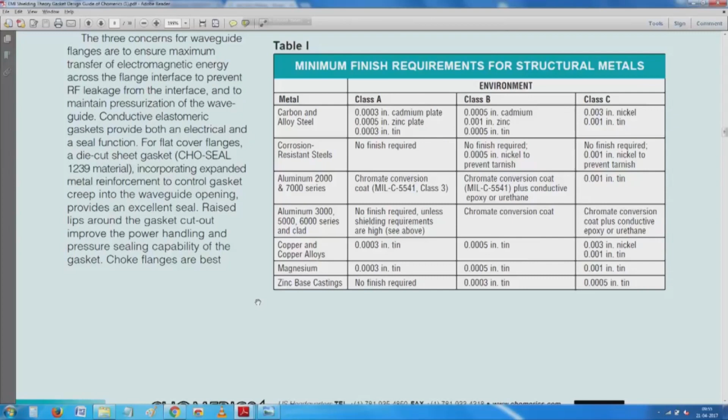So, in all this, I will get back to this thing which I left yesterday. So you see here, finish requirement for structural metals. We have this saying, what type of coating and all you give, and it seems the common compatible coating seems to be this chromate passivation or chromate conversion.

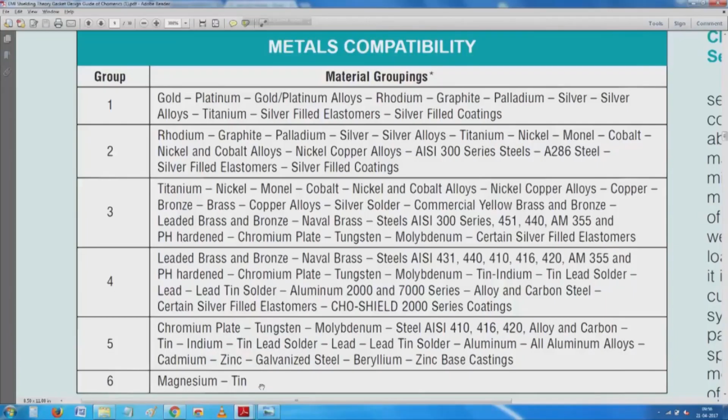As you go down, each company has its own trade name and compatibility. So you see here, the first group talks about these various things, including gold and silver and so on, and all the way down you have magnesium and tin and all that, with each of these groups overlapping, making it possible to safely use materials from adjacent groups.

So the issue here is that depending on the type of materials we use and depending on the type of contact surfaces we use, when something has to make contact, this is where the dissimilar materials issue comes in. And as if that were not sufficient, we have the problem of moisture and other, I will say, electrolyte type chemicals in the atmosphere, so everything forms a nice cell.

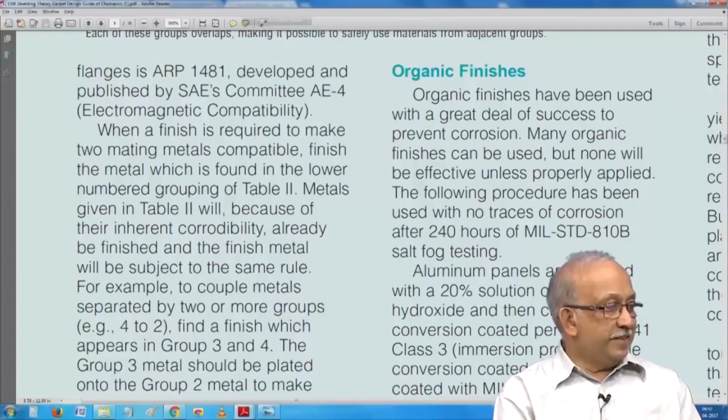I have given an example of how nickel cadmium batteries are made. So obviously nickel and cadmium do not go together. So kindly read it with me here.

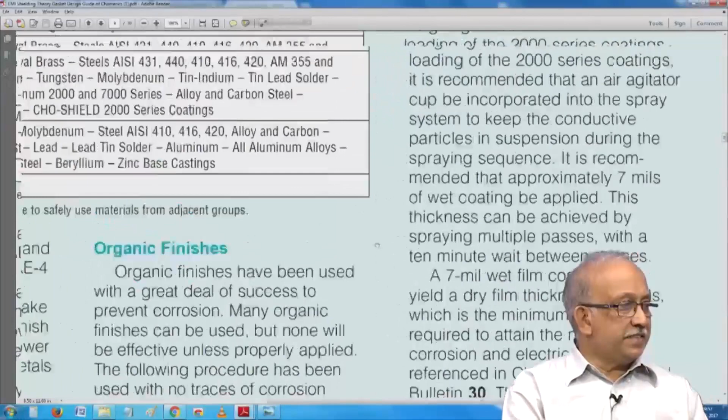So we have here a big list of chromate conversion coatings, iridite, and this can be considered as such, and then they have given, from their own characteristics, this thing, saying we try to use conductive urethane coatings.

This coating sticks to the surface where you want to make a seal, which is a very positive thing. So they have given here, saying -- I think if you remove all the double negatives and all -- not enough, actually a lot can be said about surface preparation, and it needs to be said about it. So they have given details about how much and so on.

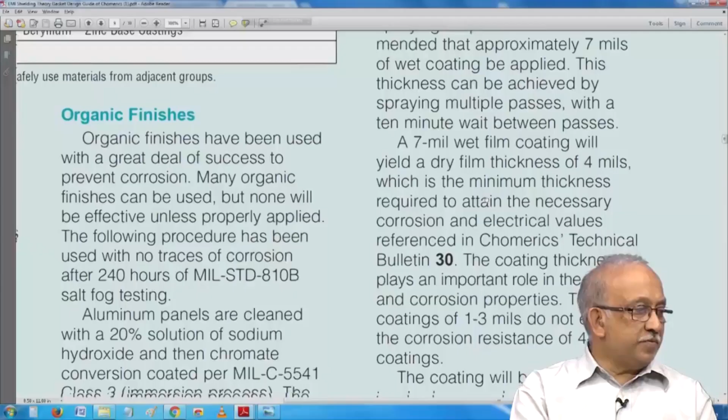Smooth to the touch when cured, recommended that the coating be cured at room temperature for 2 hours, followed by their process -- it probably comes to around 120 degrees centigrade for 1.5 hours, whenever alternate cure cycles are available, and so on. The thing is, all this has been developed saying how to apply these materials.

So, I suggest you read up more about it.

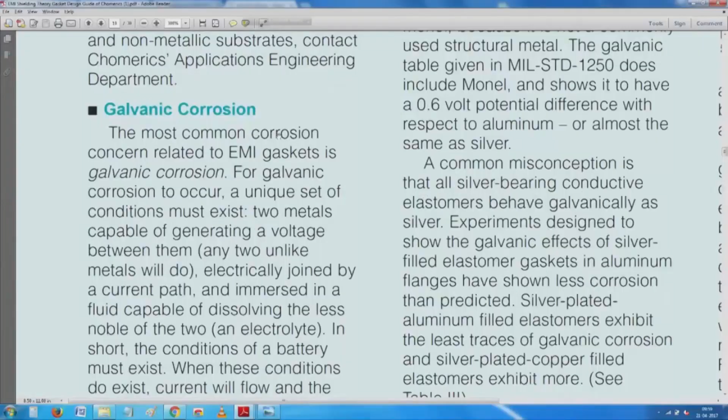What is galvanic corrosion? For galvanic corrosion, a unique set of conditions must exist: two metals capable of generating a voltage, electrically joined by a path and immersed in a fluid capable of dissolving the less noble of the two, an electrolyte. In short, the conditions of a battery must exist.

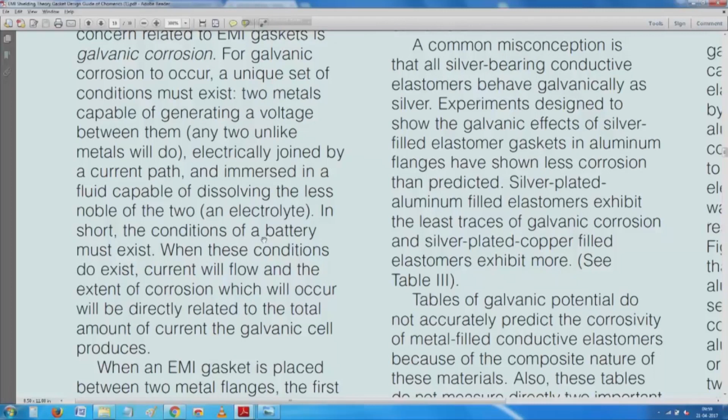This is exactly what I showed you a few sentences ago. Whenever you have a liquid that forms the electrolyte, and two dissimilar metals, it is almost like a battery. So you know what happens. When you do not want it, it will become a battery. When you want it, it does not. That is the reality of it.

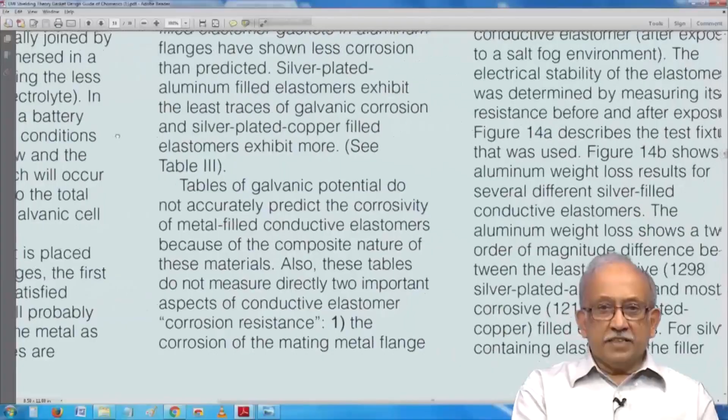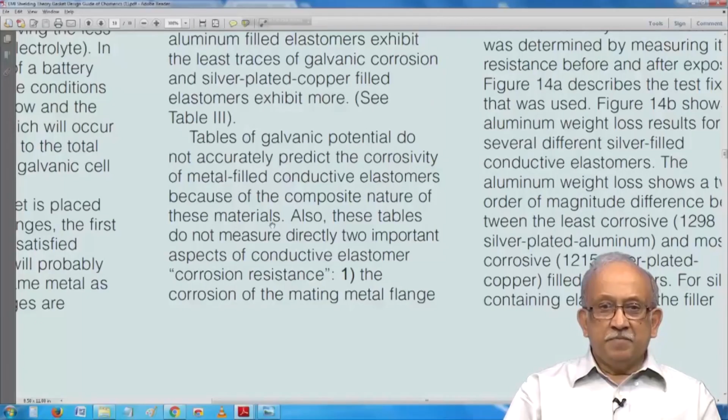So there is something called the galvanic potential. But in spite of it, a caution has been given here: tables of galvanic potential do not accurately predict the corrosivity of metal filled conductive elastomers because of the composite nature of these materials. These tables do not directly measure important aspects, such as corrosion resistance and the corrosion of the mating metal flange, and so on.

If you go down, you will see that a huge amount of data is generated. Allow me to move on to the next slide.

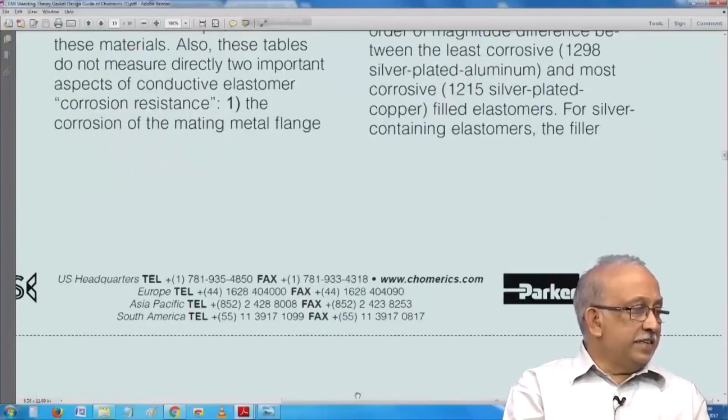So like all other tests, including IP67 tests for immersing something for long periods, and also for drop tests and all that, there is no simple easy way to predict behavior. It's chaotic.

I have told you the joke about raining on my picnic. So either way we have a problem. If I carry an umbrella, it won't rain, so I look funny. If I do not carry an umbrella, it will rain, and I get wet.

Same thing in the case of this EMI also. After the EMI, all the precautions are taken. Everything is tested using test fixtures like this. You understood?

So there's a lot of stuff about how the weight loss occurs over time, how corrosion takes away the material, and so on. So we have this very important thing.

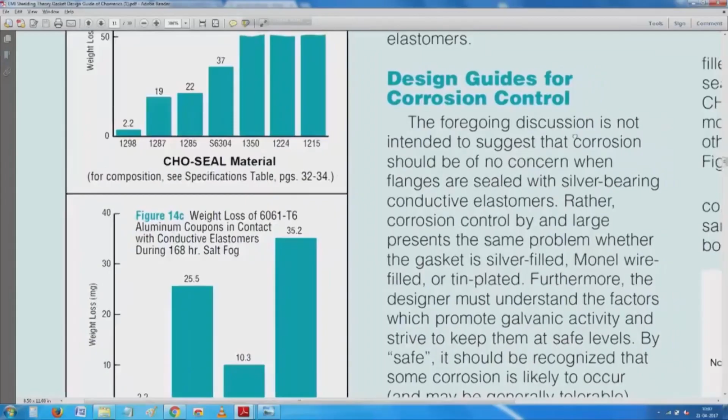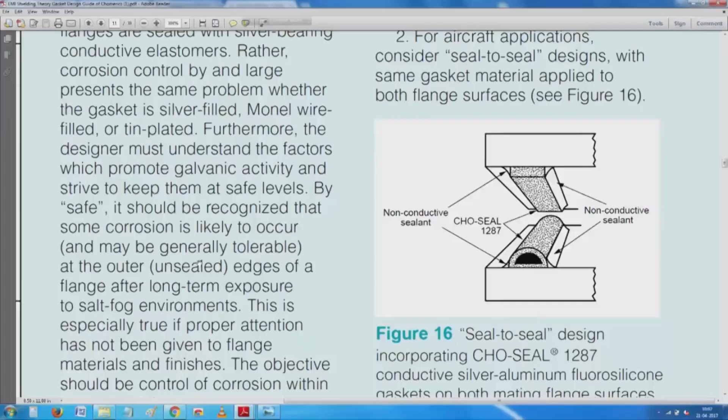Corrosion control by and large presents the same problem whether the gasket is silver filled, monel wire filled, or tin plated. Furthermore, a designer must understand the factors which promote galvanic activity and strive to keep them at a safe level. It should be recognized that some corrosion is likely to occur. So seal to seal, non-conductive, and so on - a huge amount of data is available.

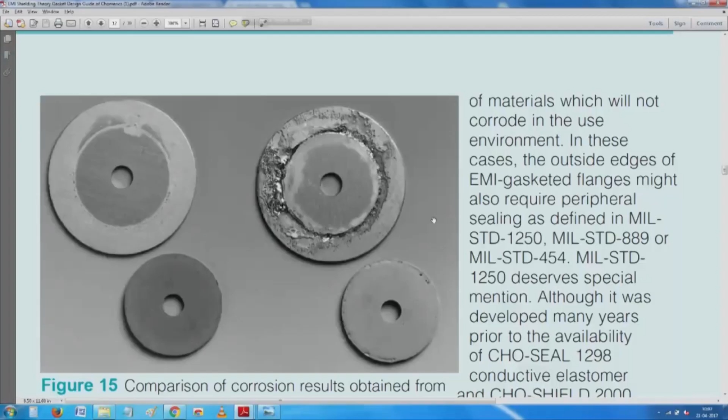And then here, pictures are shown of the test results. You see around the edge, where it is exposed to the atmosphere and can get all the necessary moisture, it has corroded all around at the edge. The center does not seem to be so bad. This is a comparison of corrosion from CHO-SEAL and pure silver filled elastomer with aluminum.

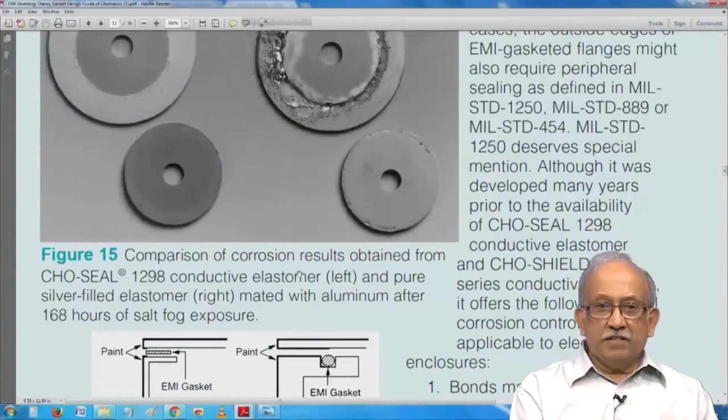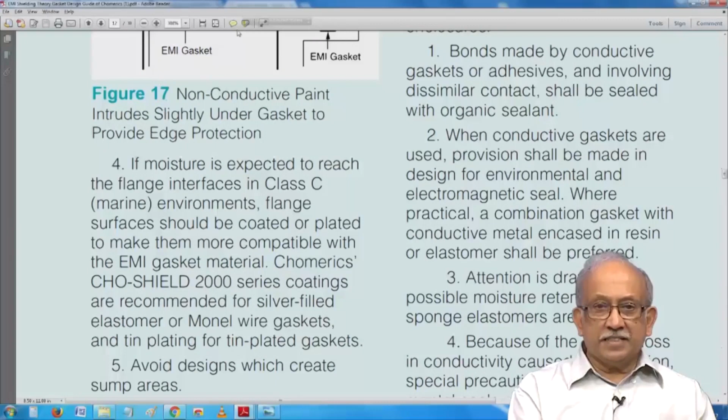This, well, I will not say it is not real, it is individually case specific. Every time there are minor variations, including the clamping pressure and the ambient conditions, we have this problem. So we have this class C test, and if moisture is expected to reach the flange interfaces in class C marine, flange surfaces should be coated to make them more compatible with EMI and so on. There is a huge amount of information on how to deal with all these situations.

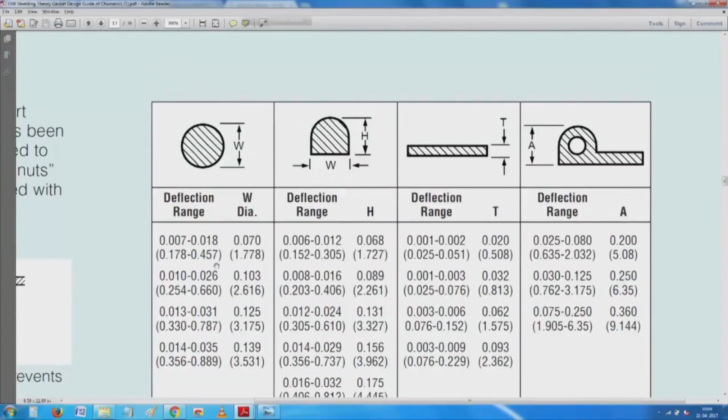So if you move a little to the right side, you see here the correct pressure and how much deflection is allowed, because that is a very critical thing. It is down somewhere here because it is a PDF file, so I need to go back. You see here, fasteners should be located such that pressure distribution is uniform at the corners, groove designs, and so on, as you go down.

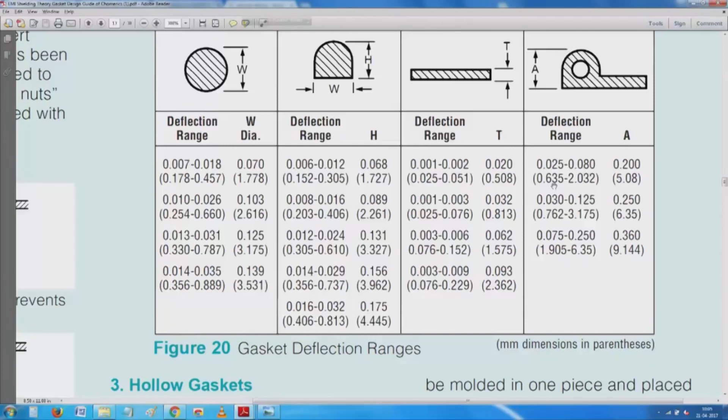So again, if you remember IP67, you need to apply force on all the sides.

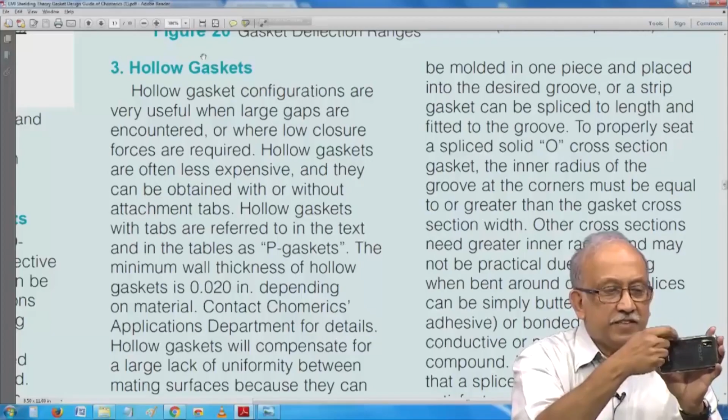If this were to be a thing that needs to be sealed, obviously you start with 1, 2, 3, all this, almost like an automobile crankcase. Large forces are allowed, but you can't do it every time. If you have a simple power control panel like what I was showing you, you can't afford to take a ring spanner and tighten everything, or in fact use a torque wrench and tighten, because there are some issues about frequently being, you should be able to do it, and then doing something like that is expensive.

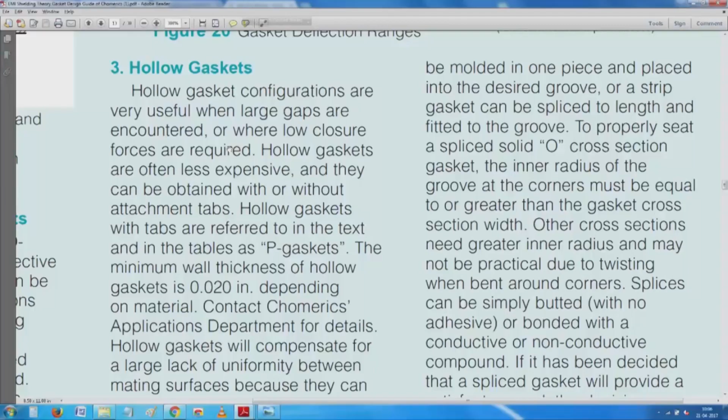So invariably they have large gaps or where low closure forces are required. So low closure force means you just need to shut and then turn one lever and the thing stays in place. That is what I had shown you on the outdoor camera there. So hollow gaskets with tabs in the text and tables are referred as P gaskets because they are a little like that. Minimum wall thickness of the hollow is about 0.5 millimeters, and then typically up to 1 to 2 millimeters.

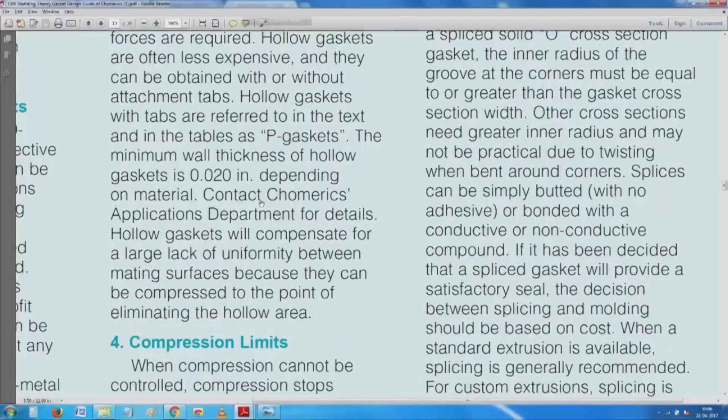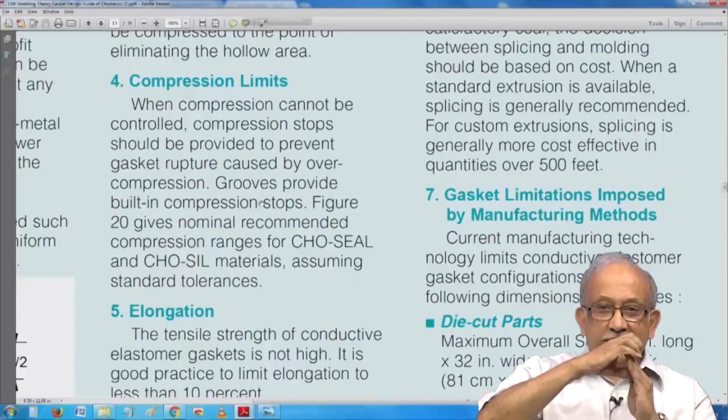So there are compression limits also, saying a compression stop should be provided. In the next few pictures, they will show you that if this has to meet here, it is not just enough if you put a little bit of gasket here. You have to make sure that you cannot squeeze it. That is what the table talks about, saying you put a stopper to ensure that beyond that it can't be squeezed. And then we have this stuff about manufacturing technology, how do you die cut and so on.

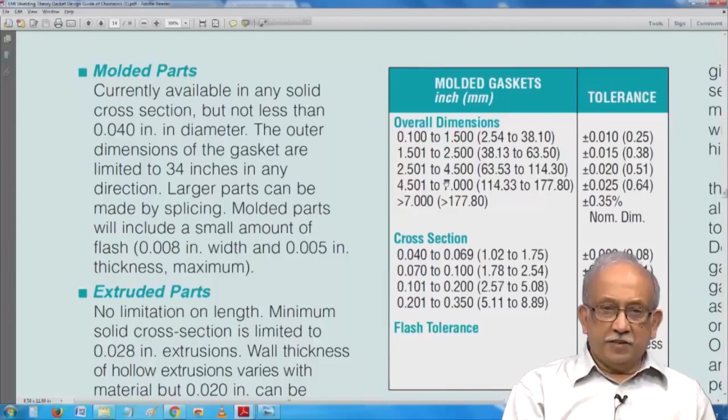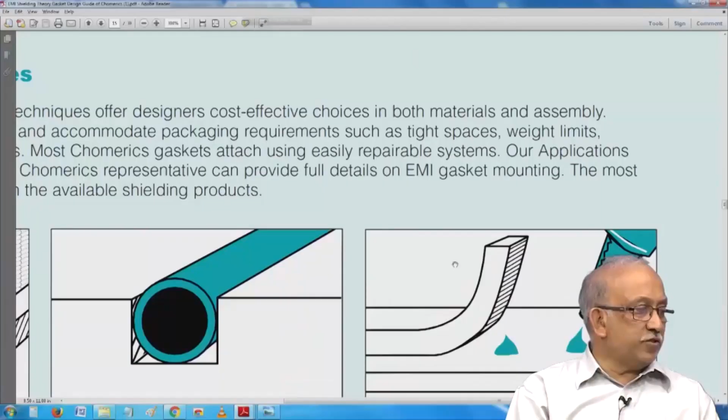So based on this, exactly because of this, when I told you, it is case specific, meaning every time we need to find out how the things work. So we have here, depending on how well the tolerances are held when you blank them out, fully mold them, or when you punch them out, or you have an extruded strip. Okay, die cut gaskets and so on. This is more a detail of the, see here, this is what I was talking about. So you have forces and thickness and all that. I will just go through quickly. Now you see here that it is just not enough.

You have pressure sensitive adhesives and how to attach it. Friction fit in a groove. So some of you who have watched people cooking using a pressure cooker, you see all the pressure cookers come with a gasket. In these parts of the country it is common, and we can't afford to have a very hard gasket where you have wing nuts on all the sides or levers and you clamp it with large force. That is only used in places like our laboratories where we have autoclaves and vacuum and pressure and all that. All other places you have just a split gasket like this, a small gasket. It sits on two things and then you close the lid and slide the lid and we expect it to stay in place.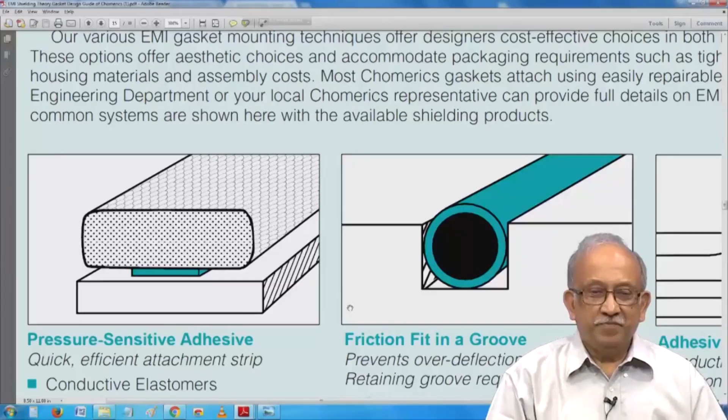It is okay, it does not matter. A gasket probably costs 50 rupees or a little more than that. I will call it $1. So you can change it once in a while. In fact, I am one of the persons who keeps a spare gasket; at the first sign of any leakage or any movement which is too smooth, we discard the old one and start using the new one. You have seen this, no?

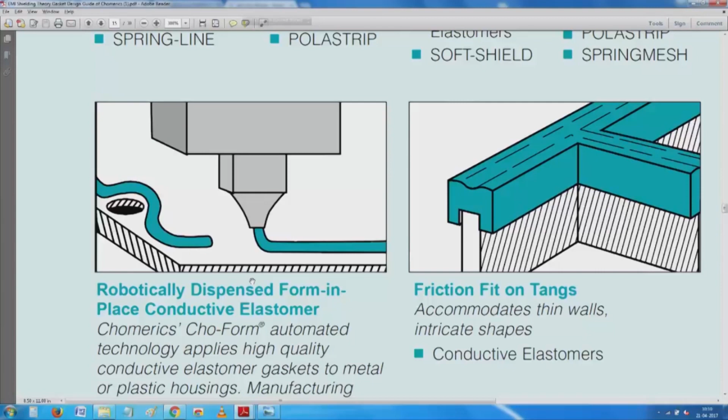We have adhesive, non-conductive, spot bonding and friction fit in a groove, and robotically dispensed form in place conductive elastomer. You would have seen this as caulking which is used for windows. You have the RTV compound, room temperature vulcanizing, some rubbery material. The advantage of it is that for quite some time it is expected to continue to be soft. It should not become hard. If it is hard, it has some problems.

So just before the arrival of winter, people probably seal all the windows with the window sealant, and afterwards they will peel it, remove all the accumulated dust and other stuff, and then we are back in business. However, in the case of professional equipment, it is not that easy. Once you keep it in place, until something functionally fails, it is unlikely that you will ever attend to it in a periodic way of replacing the gaskets every time.

However, to prevent this, routine inspection is carried out, especially for waterborne or underwater enclosures, IP 67 or 68, where somebody examines whether any of the elements here are cracking.

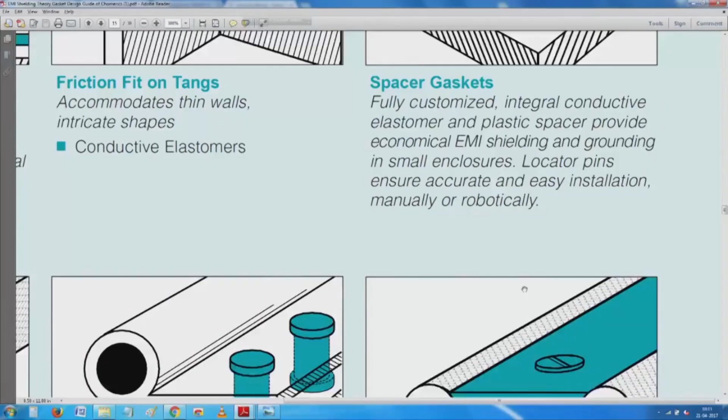So we have here friction fit. Friction fit means nothing but just push it and then it squeezes itself onto the edge of the enclosure. Then fully customized integral conductive elastomer, plastic spacer and so on. All this stuff is available from multiple manufacturers. So it is for you to decide what you would like to have, and in this you have clips to hold it in place and so on.

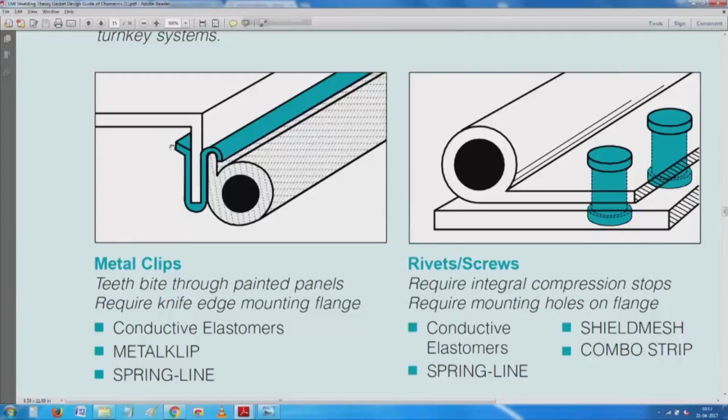If I get a chance, I will try to show a Faraday cage we have on our premises. I need to access it by taking permission. There you see that all these things that have been done here have been taken care of. So, we have all this nice

Slowly we are coming back to applied force. Most applications do not require more than 100 psi to achieve an effective EMI seal. So, you have a gasket, it has to be pressed hard. Anything more than that, as they have indicated, is likely to damage it. Anything less than that, tangential forces can come and corrosion can also start. Somewhere an optimum is around 50 to 70 psi, that is pounds per square inch.

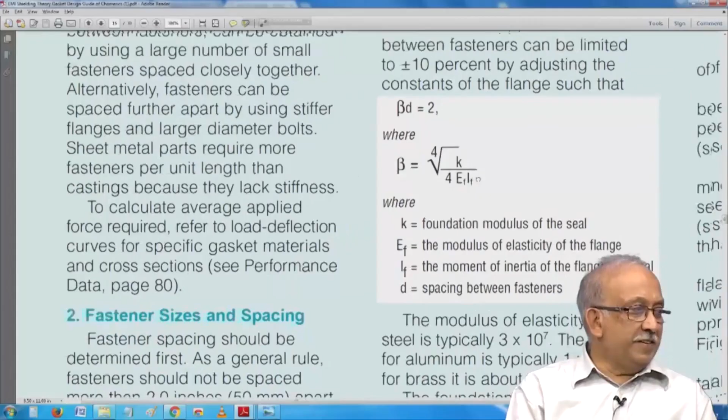Fortunately, this equation does not look so threatening, saying how much the flange deflects, fastener sizes, spacing. As a general rule, fasteners should not be spaced more than 2 inches for stiff flanges, or more than 19 mm for sheet metal, if high levels of shielding are required. The moment you leave any gap, at the time of installation there is no problem, but the slightest deflection or slightest change, often caused by temperature combined with changing humidity, will compromise the bonding, continuity and connection between them.

So, I will see if I can get some pictures before the video. So, we have our Faraday cage. In the cage, when the door is closed, all along with a pitch of 15 or 20 mm, there are fingers which make a continuous contact top to bottom, and after some use the fingers have a tendency to set. So, somebody comes to align it or something, and afterwards they replace it.

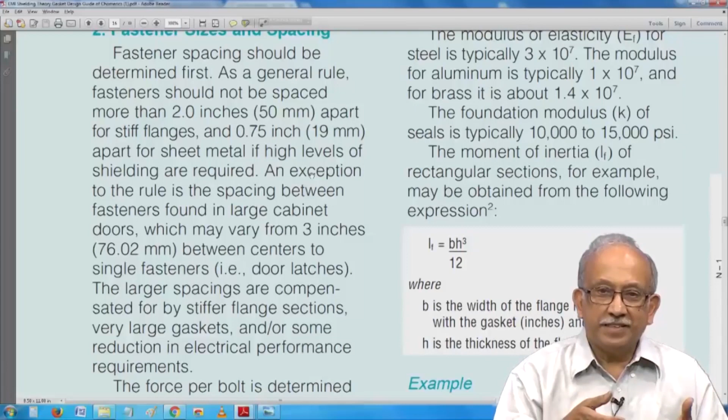And the important thing is that you must conduct a test every time. Like if you have a balance and you need to weigh something, you do a tare reset. Same way, whenever professional tests are required, before they start the test, they make sure that the whole equipment is calibrated.

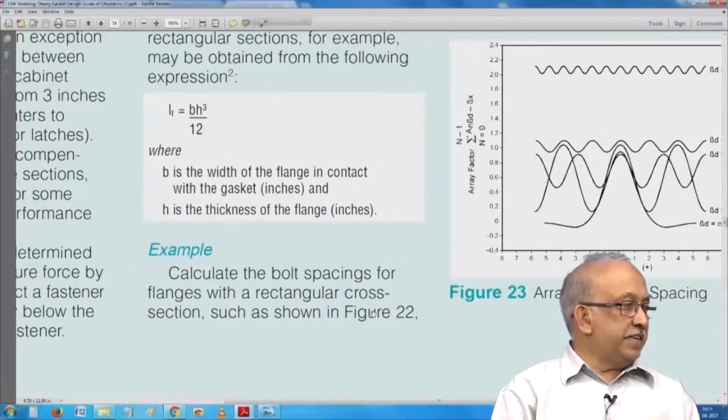So here now they have given examples of how to calculate the bolt spacing in case you want it. I think you can read it yourself. I will give you the link, and otherwise the material will be available. So, you can easily find out about the array factor, spacing, actual deflection and so on.

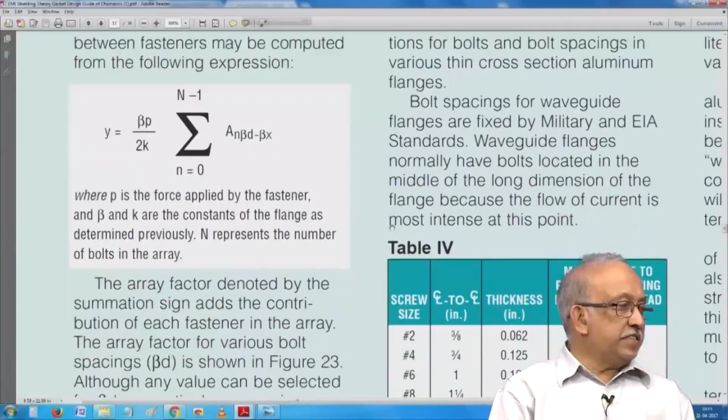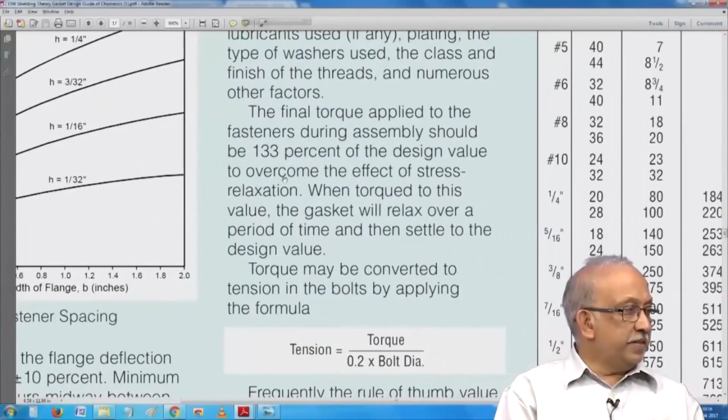And we have a little problem about waveguides. Waveguides are again a very special case. It is not connected with this at all, except that any slightest error, you may completely lose your signal. The UHF or microwave signal does not go inside at all. But you see that these have been compounded in some other way. So, all that plumbing gets seriously affected in case we over tighten things.

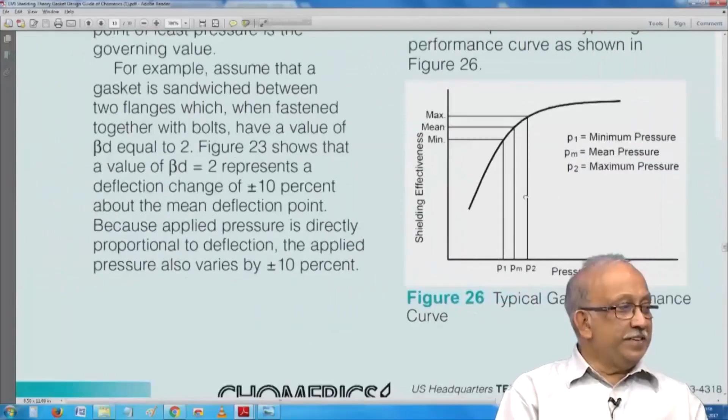So, there is a little more theory, and shielding effectiveness versus pressure is given. If you apply more than a certain pressure, it does not improve the shielding in any way. Understood? I will leave it here on two counts: because it is not immediately relevant to our packaging, and secondly, I am no expert at it, but it is for you. And most of these companies give you enough background data on how to continue with this. This is a 200-page note.

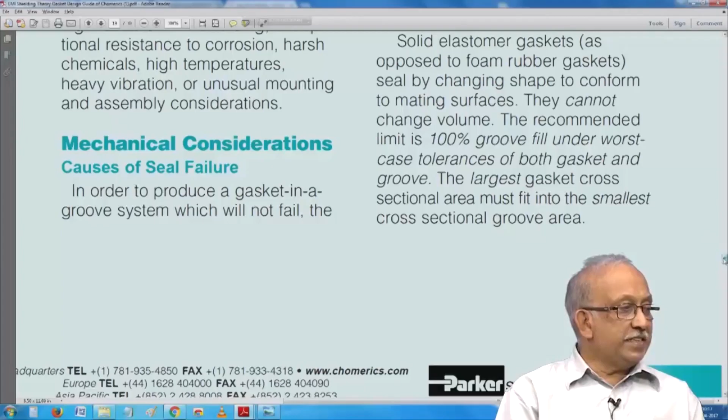So, in order to produce a gasket in a groove which will not fail and so on, you see, a huge amount of data has been given. What I was going about is, you see here, this is an interesting thing. Now you will notice

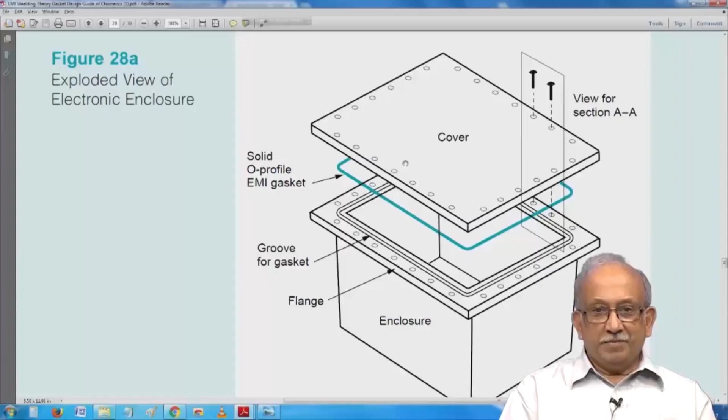Make sure that it is level. So, it is probably kept on a special clamp on a milling machine, and a small finishing cut is there. Then after this, if you now try to clamp things, and this green is a gasket, see here, so you have bolt spacing, and then you have an O strip, conductive elastomer in a rectangular groove.

You see, small errors can happen here, lack of conformity. To avoid this lack of conformity, they try to give the milling cut, so that generally they sit together. It is only in extreme cases this can be done.

If you recollect, in the video I was trying to show you the water cooled inverter. I do not know whether it is called an inverter or a drive, where because of the high current density, we actually have water pipes running inside the electronics. In spite of our using good coolant, we still have issues.

Most coolants still have a problem. If it is pure good water, obviously water has the best specific heat. Anything else you do for improving some other thing, including the boiling point, including the antifreeze, including everything, part of that conductivity comes down marginally, how well it can take away heat from the adjoining parts. And coupled with this, any of these inequities, we end up with

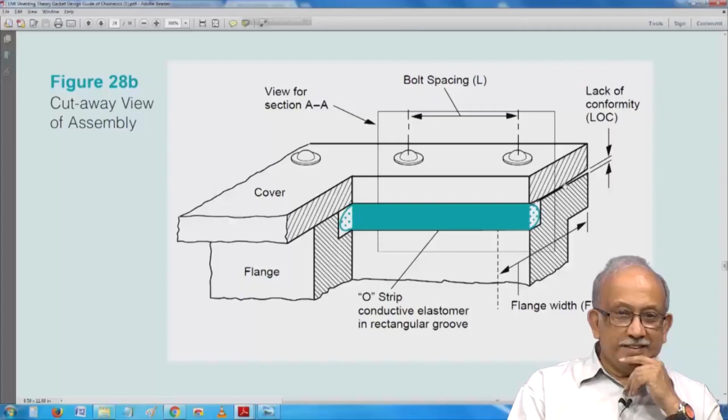flooded something. I have already talked to you about how a failure in a gasket ends up with a flooded crankcase. So, with your water, small leakages will be there which go into a crankcase, and these will get circulated. In the normal cases there is no problem, because I think routinely you check these things.

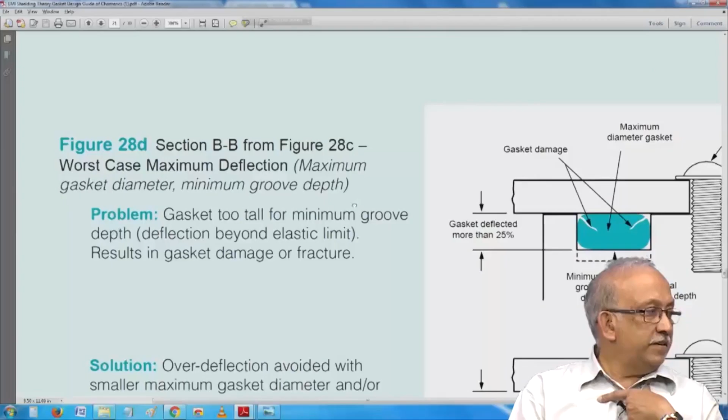So, as you go down, you see you have this beautiful thing, where the bolt is spaced, where its full force is there it is okay, but in between we have the problem of things failing a little. So, further I will go down. Maximum gasket diameter, minimum groove depth. So, you see here, these are simple cases by which

how you will pack a gasket in a groove, but these are a matter of detail, and if you are to design any of these things, most likely it is enough for you to sensitize yourself that such things exist. You will not be an expert in it, because first of all you have to locate the materials, find out all these practices. Secondly, after populating or packing the whole thing, you have to ensure that you put it through some tests.

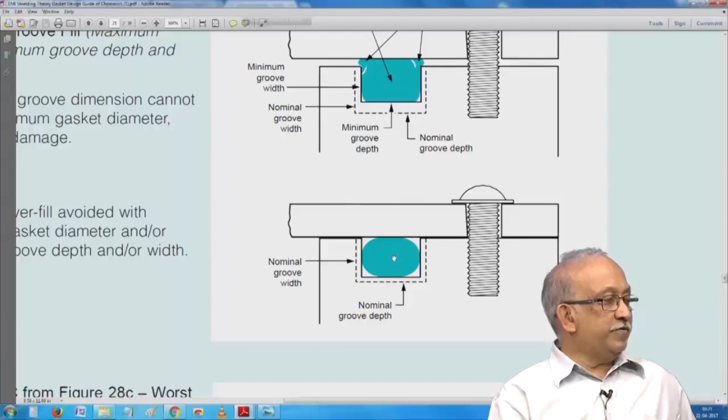So, these are all part of the testing thing, and how if you overpack it, chances are, see, there is a little bit of creep which has set in here. In this case, nominal groove width, it does not matter. So, we have so many of these nice pictures and all. Maybe this flow chart

will give you an idea. You see very clearly, there is no automatic converging set of rules which will pick one of them. I won't say it's completely trial and error, blow something and find out. It's a little iterative: select, start with something and then build on it. So it's given here: select a reasonable gasket diameter, calculate groove depth, establish tolerances.

Here is the problem. Normally most of this gasketing, if it is molded, will come in a fixed size with probably some blister pack. In the blister pack, they will probably include some adhesive if it has not come with it. Sometimes it will be dry powder, sometimes it is wet, and if it is a round or a square, it is usually folded and packed such that it sits nicely.

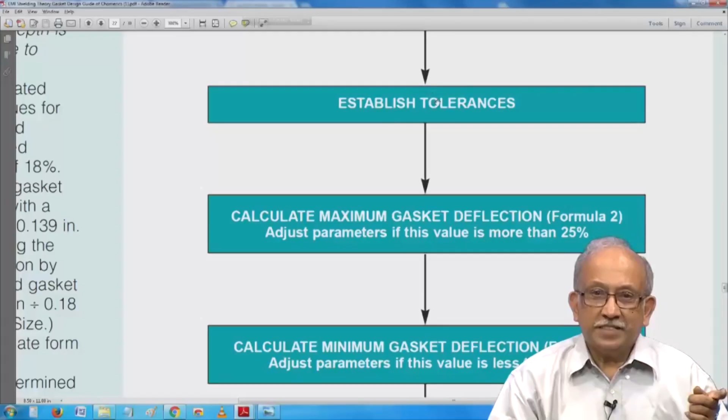So a circle, if you fold it, you can reduce the whole thing into a 1/4 of the diameter, but it will end up with 3 or 4 folds. So once you open it, somebody has to measure the thing, asking whether the tolerances are valid. Especially with something which is stored, both things can happen.

Gaskets swell, they become bigger than nominal, and also they become brittle, and sometimes they shrink. Shrinking in the thickness is not so bad, but shrinking in the overall material, the whole size, does cause a problem, which happens in the case of the cooking gaskets. If you start with an 8-inch, yeah, 8-inch looks big, 200 mm is big, probably they are all 180 mm. A worn gasket, you will notice that it would have shrunk by about 5 millimeters, and just that 5 millimeters is sufficient for it to be absolutely unusable.

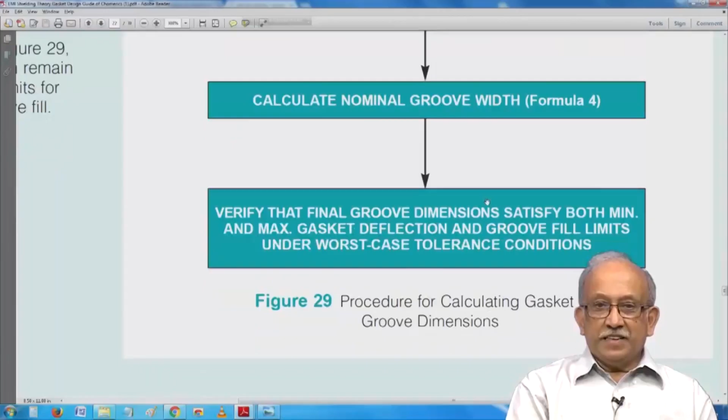So here you talk about gasket deflection, minimum gasket deflection, formula 3, calculate nominal groove width, verify that final groove dimensions satisfy both minimum and maximum deflection and groove fill limits under worst case tolerance conditions. This is only for calculating the groove dimensions, but I said it is a professional specialist job. Normal electronics people need not worry too much about it.

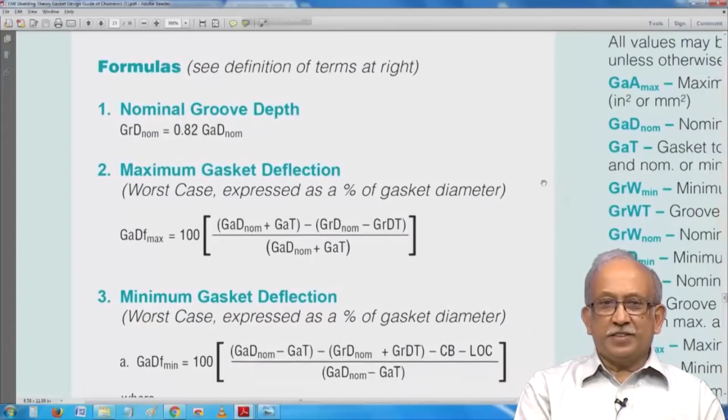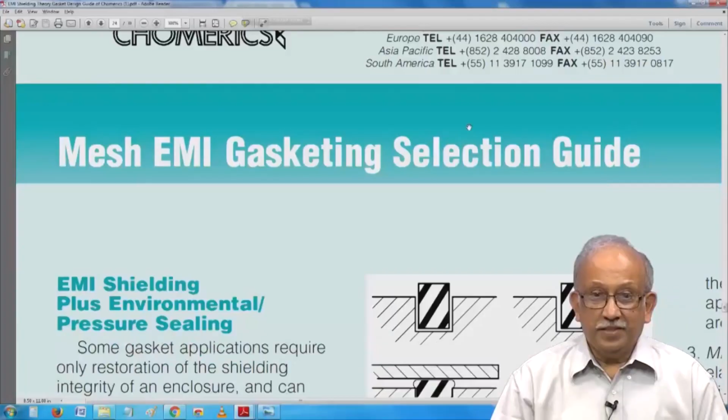So there are so many of these formulas, and fortunately these formulas are easy to use because the next level of maths is not involved. There are no integrals, no differentials, no summation, no matrix multiplication and so on. Oh, we are coming into the porous region. So far they were solid, though the elastomer may have some small cells inside, either open or closed.

We come to a very nice interesting thing, a mesh gasket. Any advantage of a mesh gasket? To start with, overall weight is less. Secondly, again going back to the original theory, depending on the frequency, the lower the frequency, the larger the holes are there. Higher the frequency, I do not know, I am not able to make out. All I know is 2.5 mm is sufficient for 30 megahertz, which was the earliest communication designs I have done.

So you see that the advantage of a mesh is they can be spaced close together, and if you just pack an area with it, overall the amount of material content is small. The moment material content is small, because a mesh is made of wire string, you can use the highest quality material, and during the manufacturing they have perfect contact. A reasonable example is your coaxial cables or even shielded wire which you use for audio. Seen that, no? It has a nice crisscross braid. Imagine the same braided thing but much more closely controlled and much thicker. So you have crisscross thicknesses of not just one, maybe a dozen layers and so on.

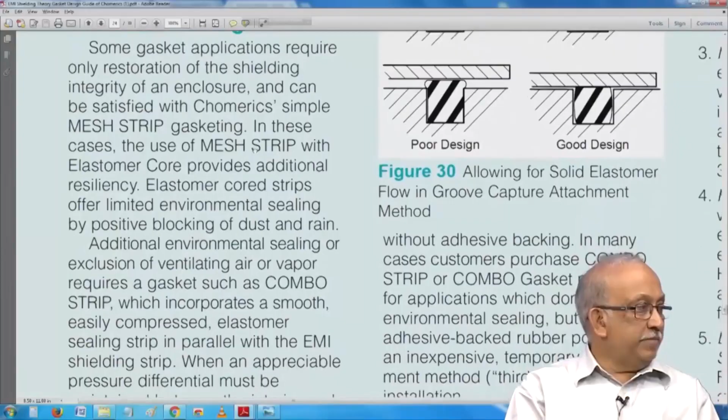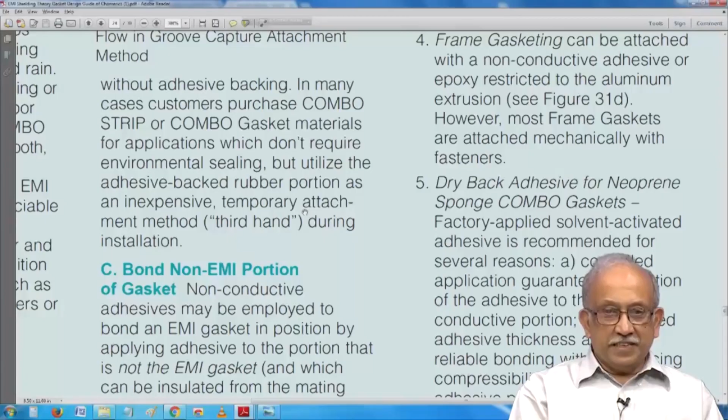Here what they have done is mesh strip gasketing. The use of mesh strip with elastomer core provides additional resiliency. A little problem with the earliest thing is that if something can be made porous, chances are it may not do the thing properly. The function of isolating or shielding may not be done properly if it is very porous, and if it is very dense, it is not flexible anymore.

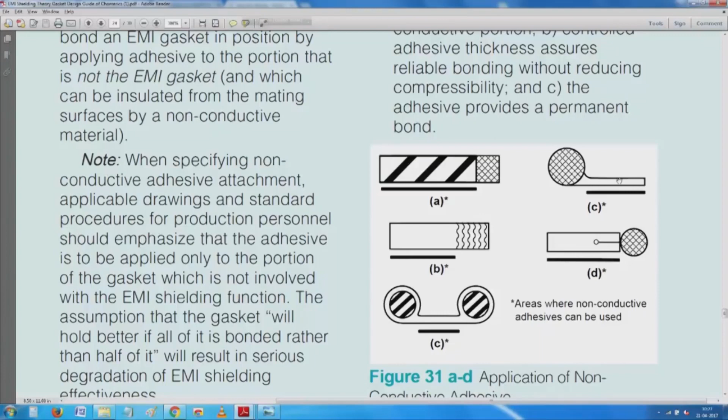So they have tried to give here, with all these things, what it is packed with. Obviously inside is where the mesh is. This part is the backing up thing, which can be held together. So things can be pushed inside. Then a simple non-conductive adhesive is sufficient, and subsequent pictures will show you more and more about it.

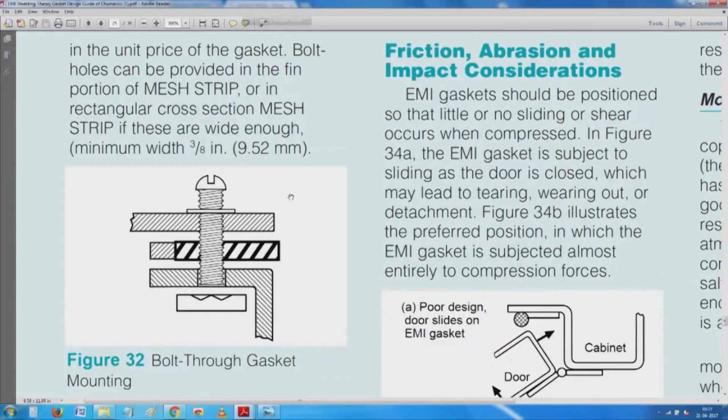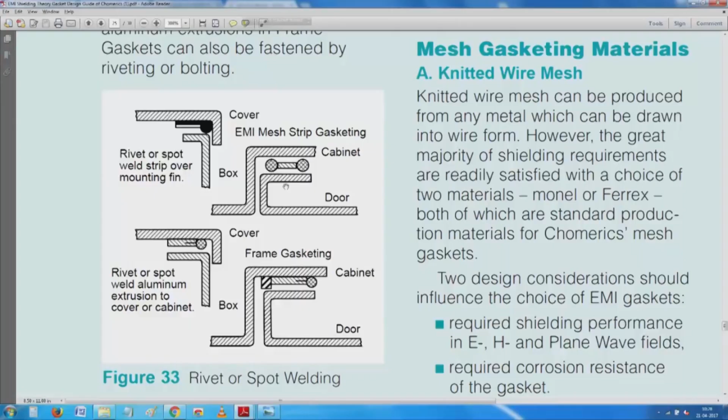So the mesh portion itself can be punched. You have the mesh portion that is punched. It sits properly, and you see here large amounts of specific cases on how to take care of most cases. So you see here there are gaps, unwanted gaps, and there are places where things touch each other. So we can see here rivet or spot weld strip over mounting fin, and so on. A large number of rivet or spot weld aluminum extrusions to cover or cabinet door.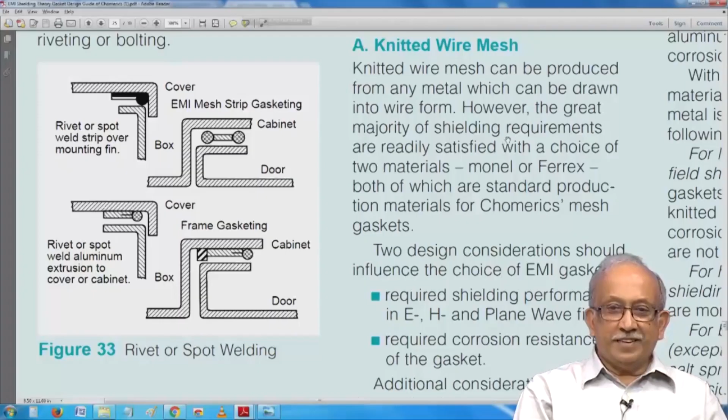It's a little like, is it not common sense? Of course it is common sense, but in the rush of things, or trying to concentrate on other things, chances are we'll miss it. It's a little like proofreading. When you write the first time, I don't think you can really read what you have written. If somebody else reads it, he'll notice that it doesn't seem to sound well. Forget idiom. Normal typos, or the printer's devil comes in. Same thing happens in the case of these.

How we implement small detailing while the doors are closed, and how we implement small detailing about how to clamp things. Yes, it is a lot of common sense. In this case, common sense being a tried and tested method as compared to hit and miss. This is obvious, I think, and you can see for yourself when you try to close the door on the top section. There is a mild amount of rubbing after it hits, and in this case it compresses automatically. While in this condition this rubbing is considered bad, in some other conditions it is considered desirable.

Whenever you are trying to make a pressure contact, which I will repeat in the connectors class, butt and wipe seems to be the best way of ensuring contact. So even in case something is not used for some time and a little bit of corrosion or something forms, if you touch something and then squeeze it, the surfaces get scraped and connected, as compared to a simple silver button in a contactor which keeps going like that, millions of operations.

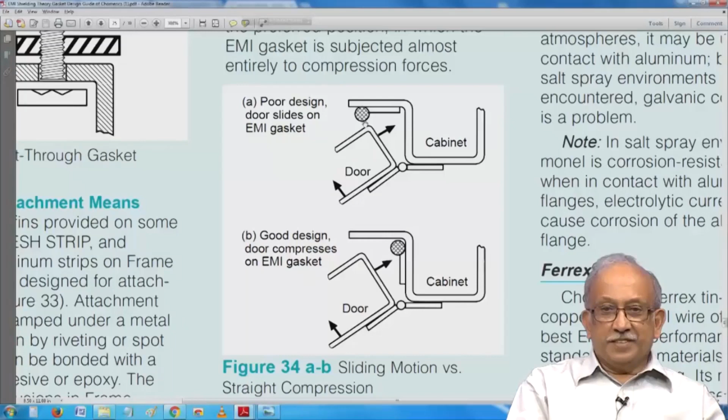So from that point of view, in this case they are saying the door slides on the EMI gasket. So it is for you to take a call on it, whether you want it to slide or not, depending on the material, the chances of corrosion and all that, and how frequently you use it. The problem is, if you want to put it into this corner, it's not easy. This corner, it looks like, is relatively easy.

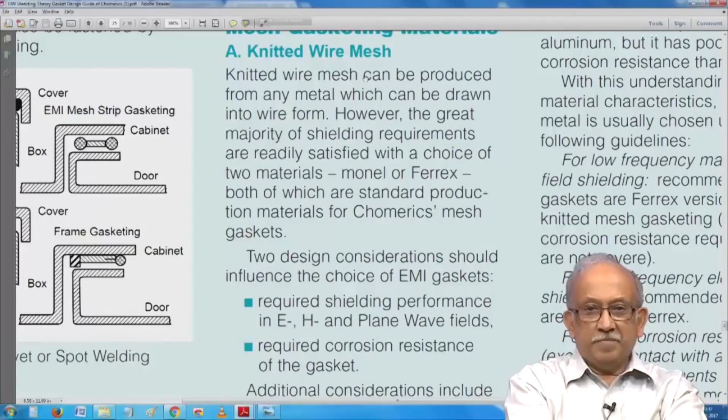So we go on to mesh gasketing materials. So we come back to knitting. Knitting is woven; we have a knit and purl like this, a series of gammas, and the next one goes into it, and that's how knitting is done, as compared to a simple mesh cloth. Knitted wire mesh can be produced which can be drawn into wire form. The great majority of shielding requirements are satisfied with the choice of two materials; monel or ferrex are standard production materials, to design required shielding and required corrosion resistance of the gaskets.

So you see here, two things are given. One is monel, the all-purpose nickel copper alloy; it resists oxidation, maintaining its conductivity, good EMI qualities, and very good mechanical strength and resiliency. In controlled or protected atmospheres, it may be used in contact with aluminum also.

Where can we see this? Next time you get a chance, and don't destroy anything, because it's not like one of those popular TV science series, have a look at your microwave oven. On that front glass, you'll see a cover with small openings. That is the one that ensures, in the unlikely case with all the internal reflections, that ionizing radiation doesn't get out. Ionizing is the one that causes burns and is suspected to cause cancer and so on. Non-ionizing, it's fine. I don't know the difference, but let me leave it at that.

And then all along where they mounted it, because that itself is either a sheet which is punched carefully or etched, or it is a coating directly on the glass. The way this is attached to the outside panel is where you are likely to see this. Similarly, when you close the door of the microwave oven, one of the things is you have a gasket there. I expect that at least some of these things are taken care of a little. I cannot vouch for that, but the total exposure time, I think the longest cooking may be around 25 minutes to half an hour. Typically everything is of the order of 3 or 4 minutes.

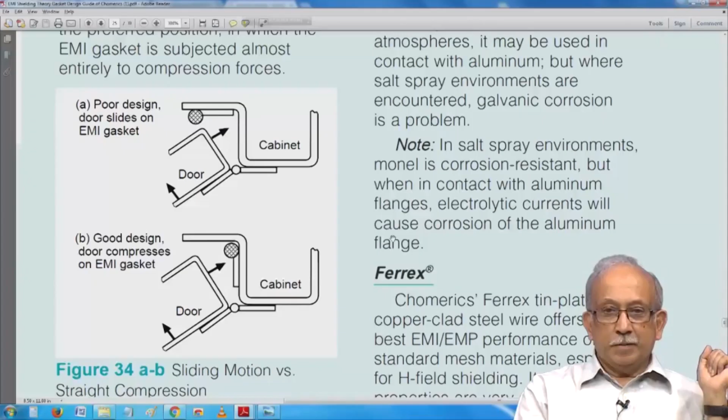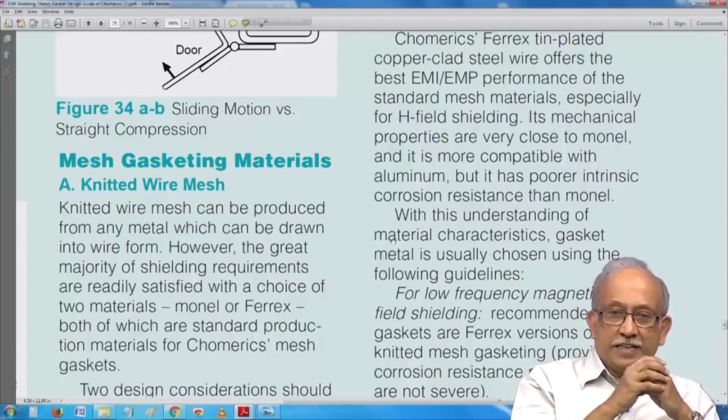Ferrex tin plated copper clad steel wire offers the best EMI performance. Leaving aside commercial or trade notices with undisclosed manufacturing processes, there are about a dozen major manufacturers who provide these gasketing materials. Other than that, there are a lot of contacts, finger contacts and ferrules which make contact here. For low frequency magnetic field shielding, ferrex versions of knitted mesh are recommended.

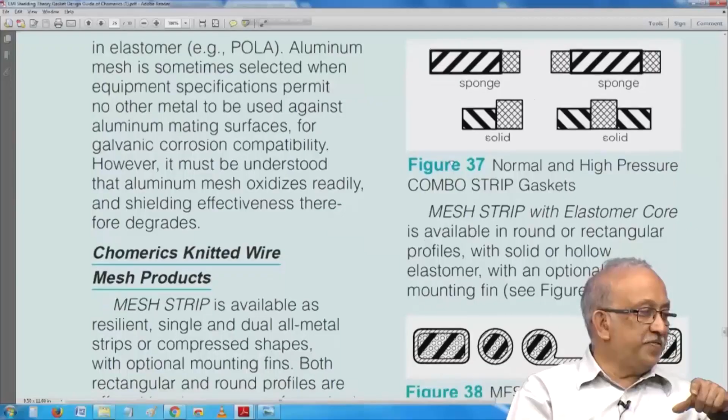For high frequency electric field shielding and so on, best corrosion resistance is needed, because the moment you have gaskets, we have all this. So there are a large number of commercial options listed in the catalog.

It is again 2-3 things. One is how do you attach or assemble it to your various parts. Another is how effective it is in the shielding. So you need to worry only about that part. I will go through it quickly, hopefully. We have so many of these things, woven wire, elastomer, and a huge range. I will see if I can rotate it clockwise.

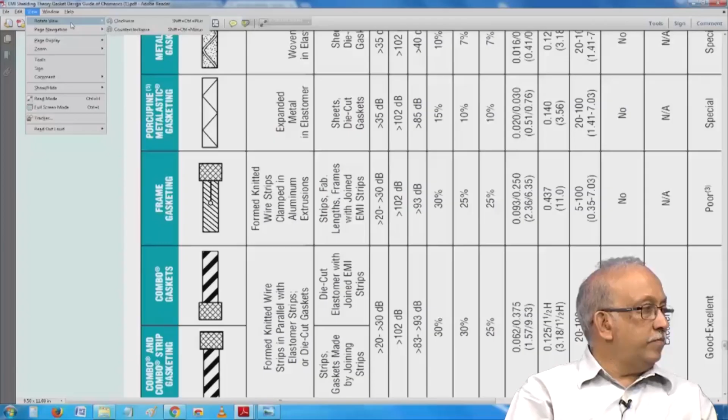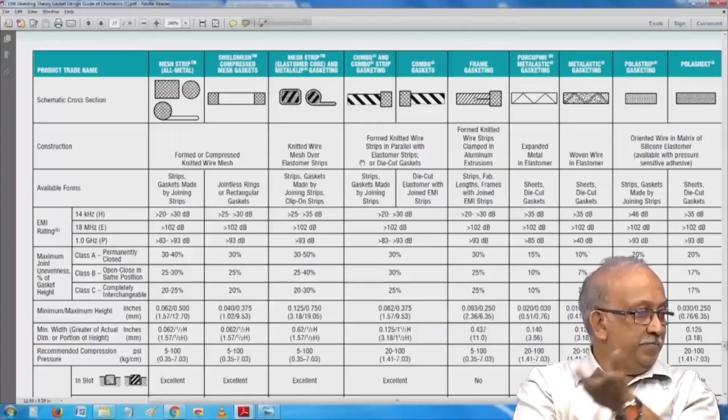So you have the trade names and characteristics and so on, and of course there are tested and proven certifying agencies which guarantee whatever claims they have made. You have seen here, the important thing is the EMI ratings.

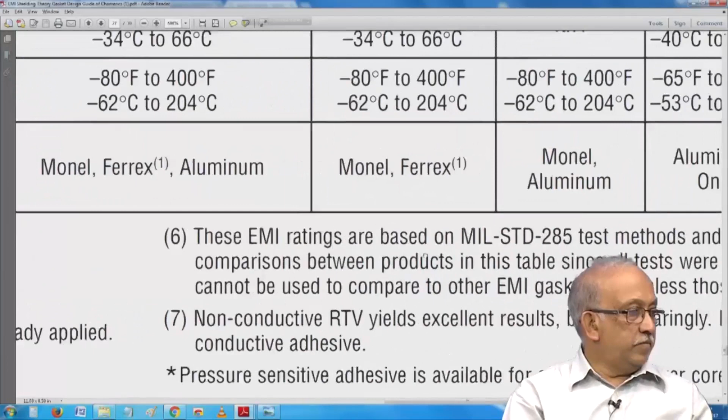MIL-STD 285 is only a test method. It does not guarantee, it is not a normative procedure saying something should have this much performance. But if you specify, whatever measured values are, they are all reported there. So you have all these various products, and just like MIL-STD, because these have all evolved from military applications, you will see that often a cross reference is given to them.

But when the standards were being prepared, it had a lot to do with how testing was carried out, so that it is field deployable or field worthy, not so much the analytical part. Probably analytical work was also carried out, but because of the speed required, it was done more by practice than preaching. Later on, I think it moved to academics, and we have all this.

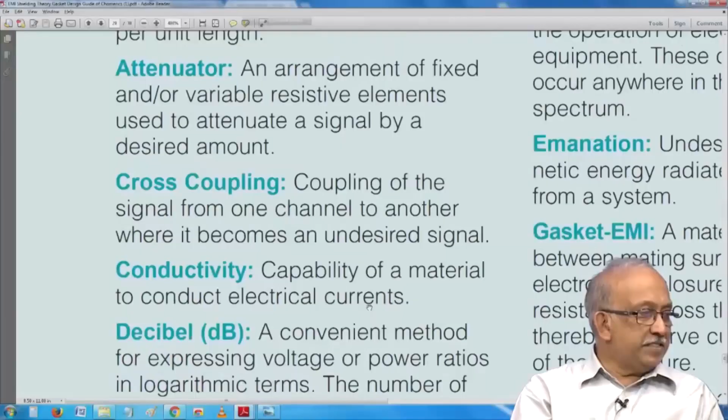So we are almost coming to the end of, I will say, the book reading session. It just mentions what all I have: degradation and so on, conductivity, mechanical properties, abrasion, resilience.

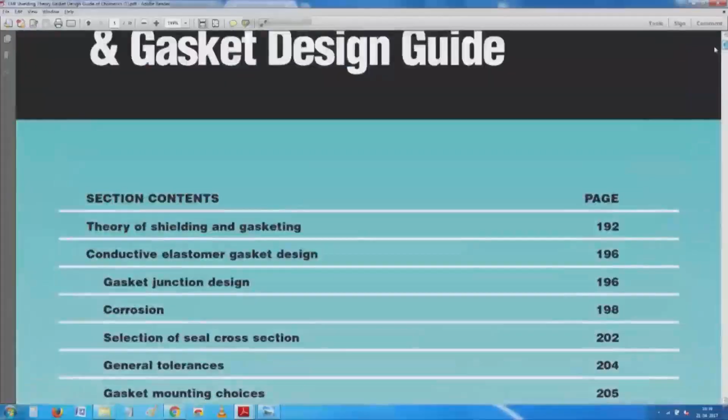So my own suggestion for you is, kindly go look at this particular thing: EMI Shielding Theory and Gasket Design Guide, from a company called Chomerics, by Parker, I think it's called Chomerics, and read this book. It's just a note, very small, the full thing is around 300 pages, but this section is only around 120 pages. I find it authoritative, with both design guidelines as well as a bit of theory backing it up. However, if you do a simple search, you will find multiple hits.

So, yes, I thought I would go ahead and try to do the next one anyway.

This particular hearing aid I have is an in-the-canal hearing aid. Earlier we had a problem trying to converse on the phone with it. So earlier, behind-the-ear and pocket hearing aids used to have what is called a T-coil, telephone coil system. Inside the hearing aid there is a small pickup which magnetically picks up whatever is provided in the telephone. Old telephones were based on a magnetic speaker. You have a coil, and surprisingly there will be a strong magnet inside. I had to contact somebody in the communication industry who explained to me why it is. You can also check up on why the magnet is needed, and then you have a disc. Whenever voltage excites the coil, you get the sound, and then the stray magnetic field is enough for the hearing aids to pick up these signals.